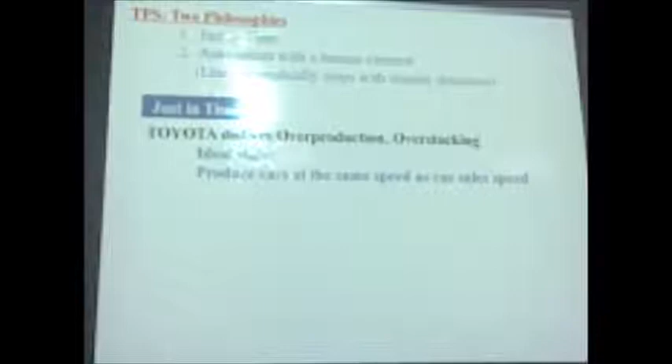Just in time: Toyota dislikes overproduction or overstocking. Therefore, the ideal state for Toyota is to produce cars at the same speed as car sales. This is the feature of Toyota. Toyota insists on one-piece flow, and they dislike temporary stock produced between sections and by mass production. They dislike such intermediate stock.

And also about the stock volume, they say the yearly inventory management cost is 20 to 30% of the stock material cost. Of course, this figure comes from the Japanese specific situation. In Japan, land cost is very high. Therefore, the inventory cost is 20 to 30%.

About the automation with a human element: it means every time the line stops with trouble detection. This basic philosophy is zero defect. If a defect is found and cannot be recovered within the time, they have to stop the line to prevent incomplete products from being sent to the next step.

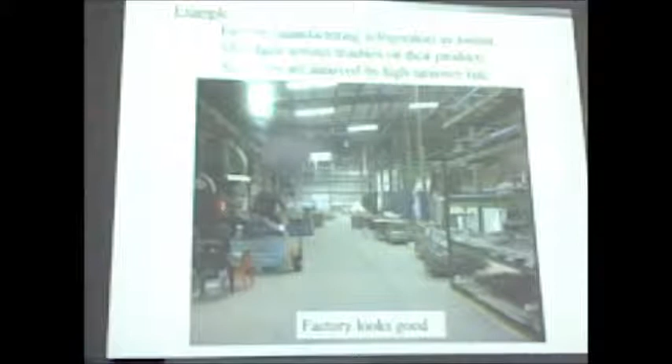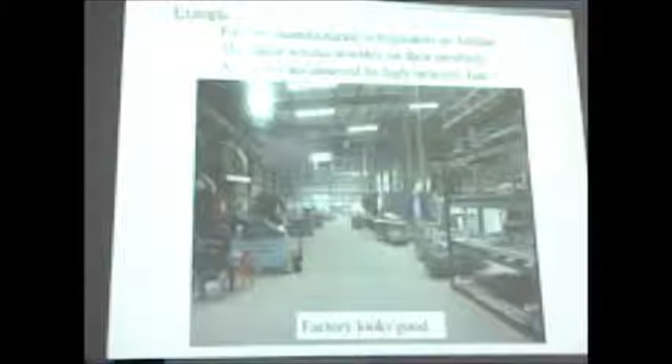Okay. I'll show you an example of 5S-related matters. This picture shows a factory manufacturing refrigerators in Jordan, with JICA. They have serious trouble with their products, and they are also troubled by a high employee turnover rate. This shows the factory overall. Looks good, but in detail, raw material storage is very messy, like this. Space is not effectively used. A PET bottle is in the box. Shelves are not clean. This is the workplace picture.

Electric cord, this red line. The electric cord is crossing over the walkway. I think this is a walkway. And this is a toolbox, very messy. Also, the same walkway. The walkway is not shown. We cannot find the walkway. It may not be straight, may be crooked. No floor marking. At a good company, they usually have the walkway clearly shown using markings. This picture was taken at the Pepsi factory in Malta. I took this.

At this refrigerator factory, if all waste materials are dumped and raw materials or intermediate products are set in order, well organized, they can reduce the risk of injury in the factory. They can get much more space to use. Simple quality troubles like contamination can be reduced. They can get a comfortable workplace. That is 5S. Through 5S, employees learn how to improve the work environment and how to find Kaizen items. So it's a first step training program for Kaizen.

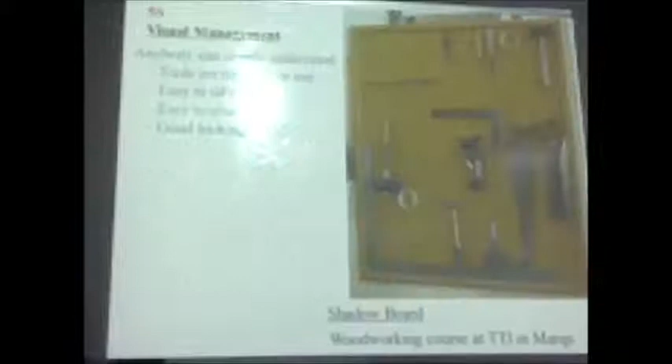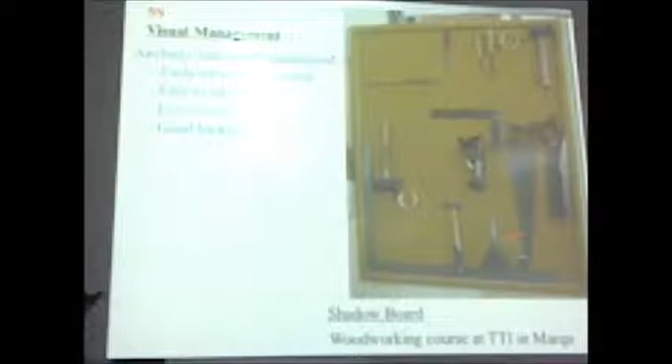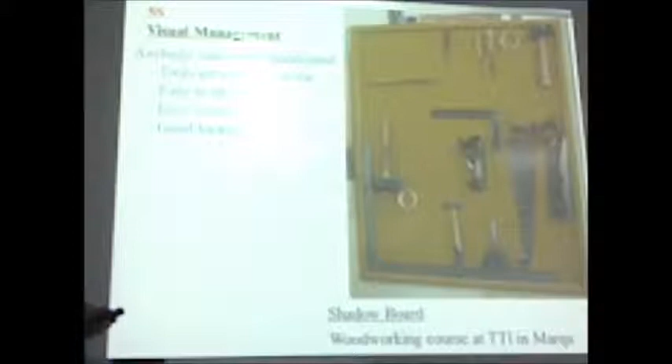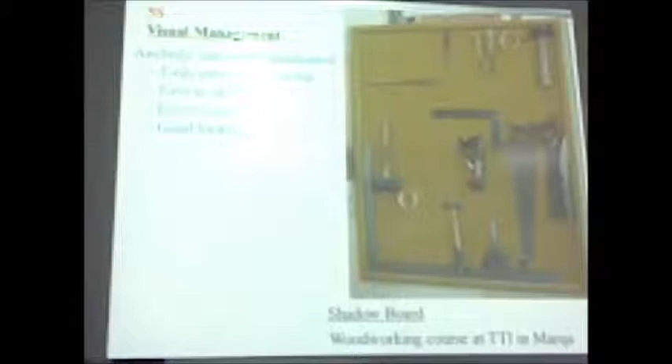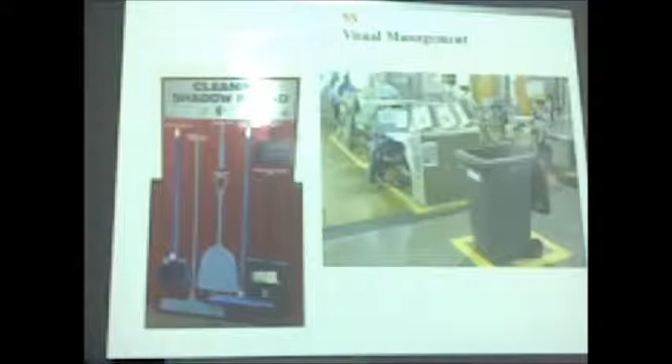Also, this shows the shadow board. We can clearly understand which tool is used now. And also, each facility's location is specified using the map. If you are working now at a factory, and some of you are, I think, please think of your factory. Clearly, locations are specified in your factory. This is the typical 5S result.

Also, for 5S, to get visual management, we use a bulletin board, and from time to time we put on the results of the activity like this. This is in Japanese, I'm sorry, but this is the implementation schedule on the bulletin board. And every team tries to put their activity on the board. It's visual management.

Sometimes participants, employees, workers say that nowadays management by computer is very easy and we can manipulate it. But in 5S activity in Japan, we never use management by computer. Every time we use the bulletin board. And by the corridor, for instance, we put up the activity results, and everybody can see the activity.

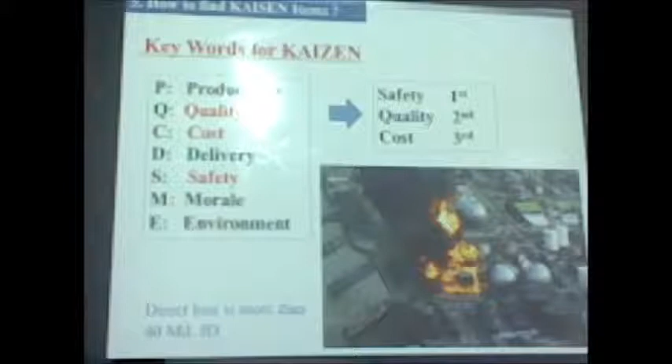This picture shows the explosion of the sphere tank at the petroleum combinat factory. The content of the sphere tank is cooking gas called LPG. From this explosion accident, the direct loss is said to be more than 60 million JD. I think the indirect cost is more than 5 times the direct cost. So safety is very, very important and the first priority.

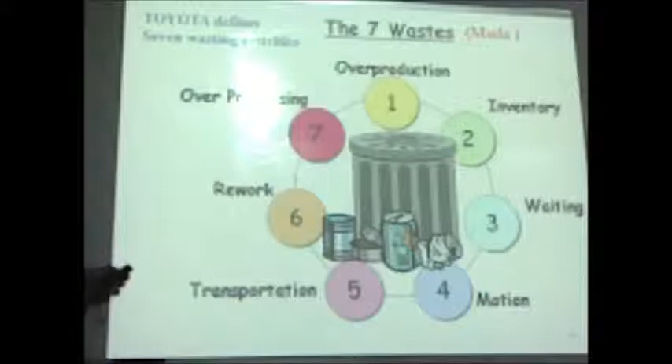Also, Toyota defined 7 types of muda. I think some of you have heard about these 7. It means overproduction; they dislike overproduction, as I explained. And they don't like to have excess inventory, and waiting time without any work. Motion, unnecessary motion, they think is a wasting activity. And unnecessary transportation from factory to factory, such kind of thing.

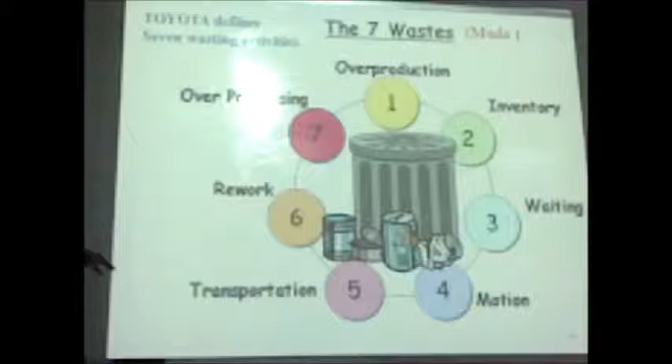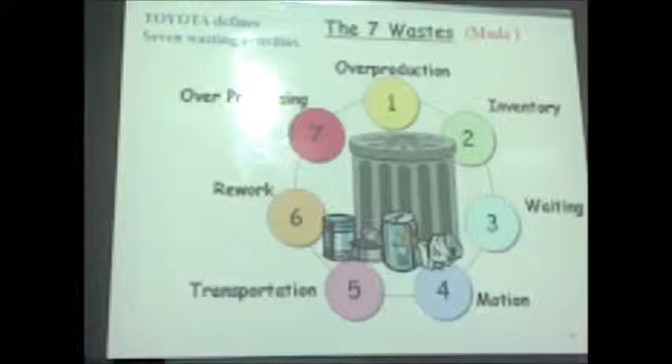And sometimes the process line has a distance. Rework because of defects, and such kind of example, over-processing, unneeded activity. These activities are called waste. So from these waste activities, we need to find the Kaizen area.

I'll show you one example in this country. I was engaged in Ministry of Health related work, and I found that in this country, drugs are stored at the main warehouse. Regarding the drug purchase procedure, I heard that the Ministry of Health has a Joint Procurement Department, and by tender, they purchase a lot of drugs at one time.